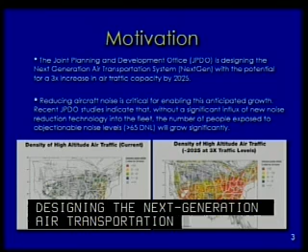In the way of motivation, as you well know, JPDO is charged with designing the next generation air transportation system, NextGen. One of its goals is the potential to increase the capacity of air traffic by threefold. Clearly, an important enabling technology for that is reducing aircraft noise to enable this growth. Without it, JPDO studies indicate that the number of people exposed to objectionable noise in and around airports will steadily increase. The graphic is just a visual representation of aerial traffic density. On the left is the current picture, on the right is if we have the 3 times growth. All of these planes in the air must take off from an airport near you and land in an airport near you.

So you see that noise is going to be a critical issue.

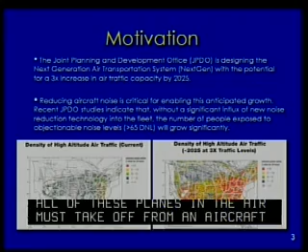Before going on, because we'll often be talking about noise levels in dBs, we thought it might be important to discuss what we mean. Because there is some subjectivity in noise, very well-defined metrics have been identified and enforced that define the effect of the noise on the community. They take into account the spectral content, the annoyance rating, duration, and this aggregate metric is called EPNdB, Effective Perceived Noise Level, dB.

For the purposes of community noise regulation, there are well-defined certification points that any commercial aircraft flying must meet in order to be certified. These are so-called approach for landing, takeoff/cutback, and sideline. There are precise trajectories, distances, and durations for these that every aircraft must follow, and the noise is measured, expressed in dB. The chart on the bottom, concentrate on the blue bars - those are representations of what would be measured at each of the 3 points: approach, cutback, and sideline.

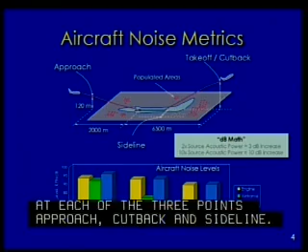In the subsequent charts, we'll often talk about cumulative margins, or margins more specifically. What we mean by that is for every class of aircraft, there are FAA rules, actually ICAO rules, International Civil Aviation Organization rules, that set limits on the noise that a given aircraft can make. The margins are what the measured level of that particular aircraft is at each cert point, subtracted from the noise regulation level. Generally you want to be below that, so that's typically a positive number. And then you do that for all 3 certification points.

You can express that as a cumulative metric - often that's what is done. But sometimes for the purposes of identifying trends, you could also look at an average. Both the sum and the average are straightforward arithmetic sums of the dB levels. An important thing to remember about dB is that it's a logarithmic scale, which means if you double the acoustic power, double the number of engines, the noise will go up by 3 dB. If you want it to go up by 10 dB, you need 10 times the power. So clearly, to make dramatic changes you need to do a lot, and the reverse is true also - to reduce significantly the noise, you need to do a lot of work.

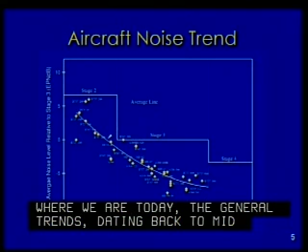Next slide, please. This graphic is meant to show where we are today, the general trends, dating back to mid-60s to about mid-2000. Not every aircraft flying is posted there, but a representative set is. The vertical axis is this average margin relative to Stage 3. The stages are the noise regulations, and Stage 3 was really the reigning rule from the mid-70s to about mid-2000. Clearly significant progress has been made over the years, and airplanes are much quieter than 20 years ago. But also, it's clear that the trend is leveling off.

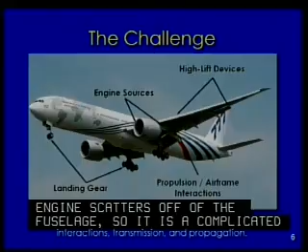And why is that? One main problem is that it is a very complicated problem. Individual sources are highly complicated, involving interactions of flow with every part of the aircraft that makes noise. And then the complicated interactions that the sources could have - the engine slung under the wing radiating is affected, the jet plume is affected by the wing downwash. The noise radiated from the engine scatters off of the fuselage, so it is a complicated problem. It's a worthy challenge to rise up to. I think the caption at the bottom really captures it: aircraft noise is a complex amalgam of sources, integration, interactions, transmission, and propagation.

Against this background of where we are, the challenges we're facing, the Subsonic Fixed Wing project, part of the 4 fundamental aero programs, has set itself goals to enable the JPDO vision. There are goals in noise, in emissions, and in performance. We have identified two generations of aircraft. If today's aircraft are labeled Generation N, then N+1 is the next generation - still a tube and wing, would look like, say, a 737, but more advanced. And then the follow-up generation, N+2, is something that would probably be radically different.

I'm not going to talk about all the goals of the Subsonic Fixed Wing project - we'll just concentrate on the noise. But the point to make here is that the levels, the targets you see, whether it's for N+1 or N+2, are meant to be the corners of the trade space.

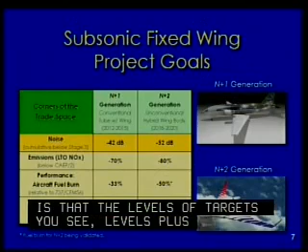If you were to optimize an aircraft just for noise, with acceptable performance elsewhere but really targeted at noise, those are the targets we think are achievable with technology that's already in the pipeline and what is over the horizon. These are cumulative margins relative to stage 3. So let's look at an average: for N+1 we're looking at 14 dB, and for N+2, 17 dB.

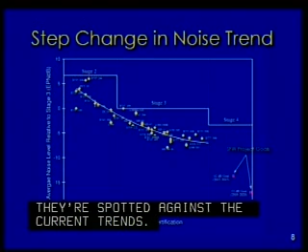They're plotted against the current trends. Clearly a step change in the way we do things, and remember the dB math—that's a significant change. So the goals of the program are very aggressive, but I think that's the kind of thing needed to achieve the JPDO vision.

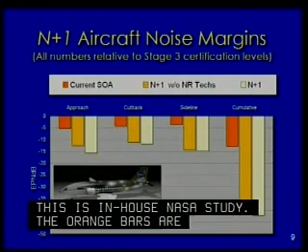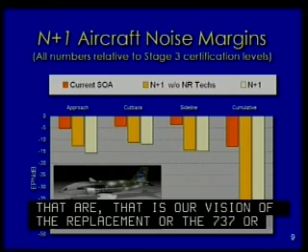A little bit more detail. This is an in-house NASA study. The orange bars are margins of a best-in-class single-aisle aircraft, something like a 737—in fact this one is an A320. It shows where it is today relative to stage 3 on a cumulative basis. The light yellow bars all the way to the right are our vision of the replacement for the 737 or A320, bringing the best of the technologies available today or in the pipeline. And you see that it's a significant change.

Technologies having to do with better airframe design, so-called ultra-high bypass ratio cycle engines, and some additional airframe and engine noise reduction technologies. Together, the so-called N+1 achieves the 42 dB goal. In fact, the goal was set on the basis of this study.

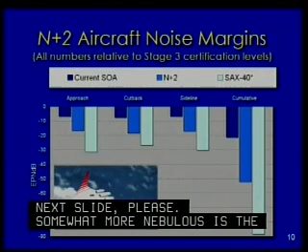Somewhat more nebulous is the N+2 design study. The dark blue, the current state of the art, is a 777, a 600,000-pound aircraft. The light blue in the middle is our vision of a so-called hybrid wing aircraft that would have significant improvements over N+1, cumulatively about 52 dB. We'll talk about the hybrid wing in great detail later, but principally it's the way the propulsion system and airframe are integrated, and the significant shielding you get from that integration that buys you the benefits.

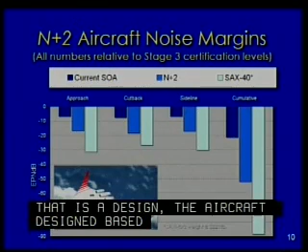For comparison's sake, we have also plotted the SAX-40. That was the aircraft designed based on the University of Cambridge and Massachusetts Institute of Technology's consortium over the course of three years—what they called a functionally silent aircraft that would blend with the background noise. So it was highly optimized for noise, and there were tremendous technical challenges that had to be overcome. They were way down there at about 86 dB cumulative. They had a much longer time horizon than what we are proposing to do, so we are naturally a little more conservative, and hence our goal is at 52.

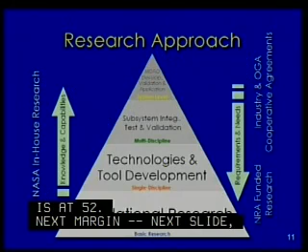Our research plan is really a common template between all fundamental aero programs, perhaps the entire aeronautics program. It's a layered approach that starts with the fundamentals—really understanding the physics of the problem and addressing the issues, whether prediction, mitigation, or diagnostics. Then we build technologies and tools at the discipline level, in this case acoustics, that address those needs, and push that up to the next level: integrate with multiple disciplines, and validate primarily the prediction tools we are developing, but also technologies, ultimately leading to multidisciplinary analysis and optimization. The knowledge and capabilities flow up, the requirements and needs flow down, and ideally this is a continuous loop so things improve constantly.

The research effort is too big for just one entity, so in-house we do what NASA does best—fundamental, leading-edge research—but we also work with our industry and academic partners to bring in talents and capabilities we may not have in-house. So we have NRA-funded research, primarily with universities but also some industry, and we also have partnership opportunities with industry and other government organizations. While NASA in-house research is really at all layers, the NRA-funded research tends to be at the fundamental and discipline level, though it can creep up to the next layer. The cooperative agreements are primarily at the multidisciplinary and system level approaches.

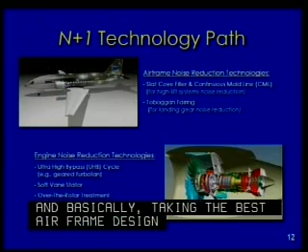Okay, we talked about the goals, 42 dB relative to stage 3. Here's the technology path: basically taking the best airframe design today, probably a 777, with the best high lift system, and scaling that down to the 737 class, assuming you can maintain the noise benefits.

Add some technologies to further mitigate noise from the high lift system, from the slats, from the flaps, and from the landing gear. Then mate that with a new propulsion cycle. Well, not new, but one that's been waiting in the wings, and I think it finally has its time in the spotlight - the ultra high bypass engine.

Basically, you slow down the fan tip speed. This way you reduce fan noise. You also reduce jet exhaust velocities, a notoriously difficult problem to mitigate. So you get significant benefits from the cycle alone.

But for insurance purposes, we also add some fan noise reduction technologies, specifically soft vane stators and over-the-rotor. We'll talk about the soft vane stators later. Both of those technologies, in fact, have NASA patents pending on them. So this is our technology path for N+1.

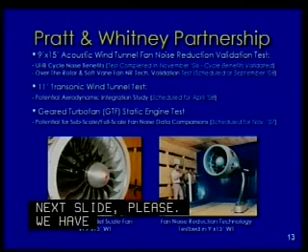Next slide, please. We have formed partnerships in the past, and we are continuing to develop partnerships now with industry partners who can help us push the front along on these technologies. Specifically on the propulsion side with the ultra-high bypass, we had studies that we did jointly with Pratt & Whitney.

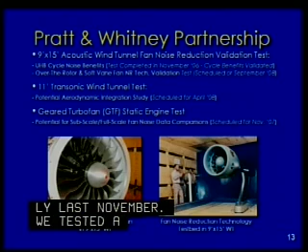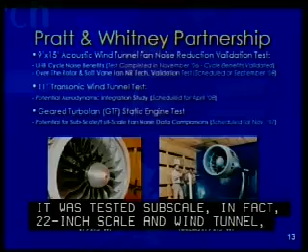Last November, we tested a scale model cycle of their version of a UHB, called the geared turbofan. It was tested at subscale, in fact 22-inch scale in a wind tunnel, and basically demonstrated the noise reduction benefits of that cycle. We are planning next September to test the over-the-rotor and soft vane technologies to buy us the extra margin we want with fan noise reduction.

There's potential now to work with Pratt & Whitney, still in negotiations with them, to do some integration studies in the wind tunnel. They also are planning, in fact have on schedule, to do a ground test of the fan system for the geared turbofan. So there may be an opportunity for us to work with them and compare the scale model noise data with the full scale to see if that connectivity is there the way we think it is.

I'll now hand off to my colleague to walk you through the next few slides. Russ? Good morning.

Next slide, please. We continue talking about our partnerships with the NASA Gulfstream partnership. This partnership is centered on the major airframe noise sources: the nose and main landing gear, and the flap side edge noise sources. You can see in the photograph of the aircraft flying, the flaps deployed - the sharp edges on the side are one of the important airframe noise sources.

This is a very exciting partnership. It's got a detailed 5-year plan, already 1 year into the plan. It began in FY07 with a flight test at the Wallops Island Flight Test Facility, and it will continue for the next 4 years, both with additional flight tests and a series of component tests of increasing complexity.

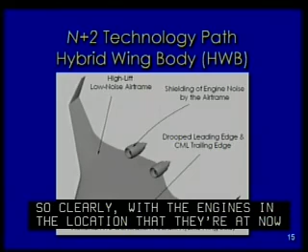Most dramatically, you see the engines can now be moved from the bottom of the aircraft to the top, and this introduces the potential for shielding of propulsion noise sources. With the engines in this location, you see the potential for large shielding of the forward radiated propulsion noise sources. It'll be a challenge to obtain shielding of the aft radiated sources, and that's going to be a large focus of continuing work.

It also changes the way the aircraft flies and the way the high lift system is integrated into the aircraft because of the blended wing body shape.

There's that blending of the airframe components as well.

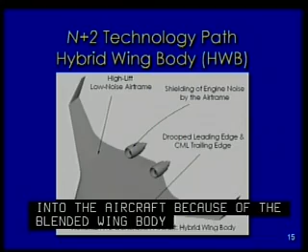Next chart, please. We've just concluded round 2 of the subsonic fixed wing NRA process, and I'll discuss several of the awards there that are very important in the acoustics area and directly related to this N+2 technology path.

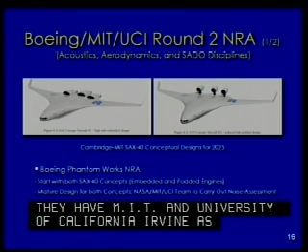The first award, just completed negotiation and awarded just 3 weeks ago, is led by Boeing Phantom Works. They have MIT and University of California, Irvine as subcontractors. We're beginning to integrate a large team from NASA in the acoustics disciplines, the aerodynamics disciplines, and the system analysis and design optimization discipline as well.

The Boeing team was able to take advantage of that same Cambridge MIT Institute work that was done on the Silent Aircraft Initiative over a period of 3 years. They'll start with these 2 aircraft concepts that are shown.

On the left, you see the SAX-40 design with the higher risk, higher payoff technologies that included embedding the engines in the airframe. On the right, you see a lower risk, but still a dramatic step change in technology and noise reduction potential. It's the podded version of this aircraft.

The Boeing team will start with these 2 concepts, and over the first year, they will go into much greater detail of the design, closing out the aircraft design in 1 year. They will look at technology suites to add to these aircraft, and by the end of the first year, working together with NASA, they will plan in year 2 and year 3 a large-scale, high-fidelity wind tunnel test.

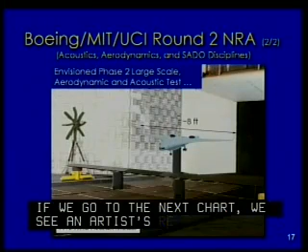If we go to the next chart, we see an artist rendering of what is envisioned for that phase 2 large-scale, high-fidelity wind tunnel test for both aerodynamic as well as acoustic characteristics of this type of aircraft. We see the 14 by 22 wind tunnel with this concept ready for testing there.

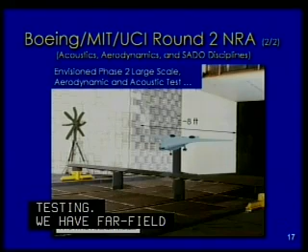We have far-field microphones deployed, the latest phased array technology to image the acoustic sources. This is going to be a big challenge. As we bring the airframe noise sources down and the engine noise sources down, it's going to take a greater resolution of measurement technology to properly characterize these.

And so this is envisioned for the phase 2. It'll occur in 2010 if we proceed to that stage. Next chart, please.

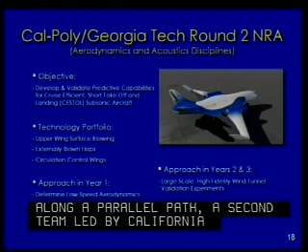Along a parallel path, a second team led by California Polytechnic with Georgia Tech as subcontractors are also proceeding. In this case, they're going to be focusing on that metric that was listed in the subsonic fixed-wing goals for field length, going after the cruise-efficient, short takeoff and landing subsonic aircraft concept.

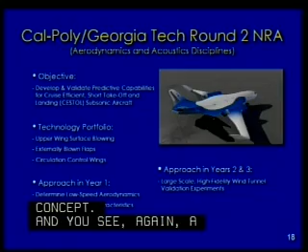You see, again, a rendering of that type of concept. They'll look at the technology portfolio, including upper surface blowing, externally blown flaps, circulation control wings that enable this short field takeoff. Again, in year 1, they'll be putting together the tool set to design and optimize this type of configuration. A key is going to be how they integrate and predict the acoustic characteristics of these technologies integrated into a complete aircraft concept.

Then, like the Boeing-led concept, in year 2 and 3, they'll be putting together plans to do a large-scale, high-fidelity wind tunnel test of this type of concept. In this case, they're aiming now towards the National Full-Scale Aerodynamic Complex, in fact, at the NASA Ames site.

Next chart, please. A different set of concepts were awarded in round 2. Whereas the first 2 focused on the complete aircraft concept and technology, these are going to focus more on individual technologies, which we think are very promising and can really change the way aircraft are designed and flown and impact the acoustic characteristics.

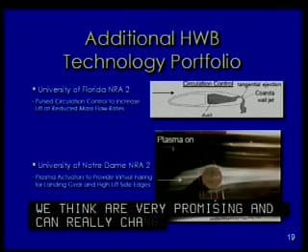The first is at University of Florida. It's going to be focusing on circulation control. Of course, this technology can dramatically increase lift coefficient and therefore enable lower speed takeoff and landing, and also increase the separation between the aircraft and the community below, and change the airframe sources as a result of that.

In particular, they're going to be looking at pulsed circulation control, or unsteady circulation control, which can increase the lift while reducing the mass flow requirement through the circulation control jet. And of course, they're going to be developing a very high quality aerodynamic and acoustic data set, which has not been done before. That's going to be a very important step forward in understanding this technology.

The second one will be done by University of Notre Dame, and it's on plasma actuators.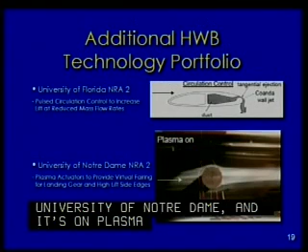You see there in the photograph to the right a cylinder in a wind tunnel, and smoke visualizing the flow field, flow from left to right. Normally, flow over a cylinder you would see a large separation zone downstream, but with the plasma actuators on, the flow is smooth over the cylinder, and there's no large separation region.

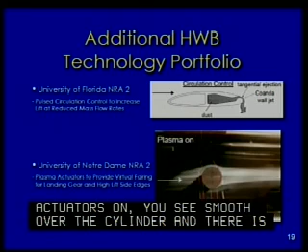Plasma actuators hold the promise to provide virtual fairings for airframe noise components like the landing gear and the flap side edges. We think it's a very promising technology with multiple applications, and we're looking forward to this work as well.

One of the keys here is to push the technology of plasma actuators to higher Reynolds number, more realistic applications. Next chart, please.

So we're very excited about those NRAs and the potential for what they can do in the N+2 category.

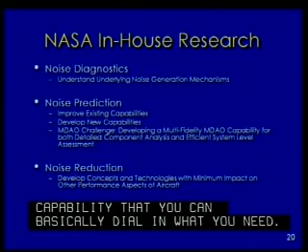The challenge we've set for ourselves is to develop a capability where you can basically dial in the fidelity that you need. If you're studying a specific component and can afford the computer resources and time, you can study it in great detail, and we'll show some examples of that. But you can also turn the dial to something not as high fidelity but more efficient, so you can do a system level analysis and study a number of systems in a reasonable amount of time.

Ultimately, the diagnostics and prediction are going to help us devise noise reduction technologies that have minimum impact on the other performance aspects of the aircraft. We have traditionally worked these in a synergistic manner, so there's a give and take and a continuous improvement loop between these. Next slide, please.

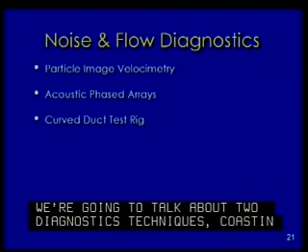I'm going to systematically go through and show highlights. Just like the entire presentation, this is only a highlight of what we do, but I think these are areas where NASA is doing very well, in some cases at the leading edge of that work. I'm going to talk about two diagnostic techniques, particle image velocimetry and acoustic phased arrays, and also a new capability we are developing at NASA to really understand liner physics.

Next slide, please. On the PIV, particle image velocimetry, and phased arrays, the top graph shows an actual visualization of the turbulence in the jet plume of a co-annular jet. This was a scale model test. By seeding the flow with particles small enough that they don't affect the flow but large enough to reflect laser light, then using very complicated image processing, you can develop a snapshot in time of the intricacies of the spatial distribution of a major source of, in this case, jet noise, which is turbulence.

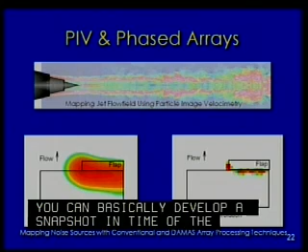This technique is now pushed into the time domain. There have been recent tests at NASA where you can actually sequence this in time and trace the evolution of turbulence, which is equally important in jet noise research. We have also attempted to do PIV for turbomachinery behind fans to understand the evolution of turbulence from the fan rotor as it impinges on the stator. On the bottom is a graphic of another area where NASA is very good: phased arrays.

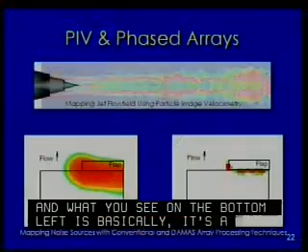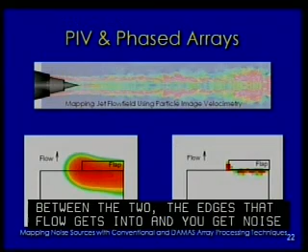What you see on the bottom left is basically a main wing and the flap, and the noise source is the discontinuity between the two, the edges that flow gets into, producing vortex shedding and noise. Using conventional beamforming methods, the analysis of phased array data which is essentially an acoustic camera, it's not very clear what the primary source is. But a method developed at NASA called DAMAS, the deconvolution method, actually filters out the extra noise, and you can focus on the real source, which is the flap side edges.

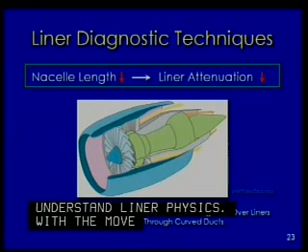On the diagnostics, I'll talk now about a set of unique capabilities we're developing at NASA to really understand liner physics. With the move toward larger diameter engines, UHBs, the nacelles need to be shorter because of weight considerations. That reduces the real estate you have to apply liner. So understanding the liner physics so you can optimize it and take advantage of the minimized real estate is very important.

What we are doing in this program is developing two sets of unique capabilities to address grazing flow effect on the liner. You can measure the liner in static condition and it will have certain performance, certain impedance characteristics. You put flow over it, things change, and of course there's flow inside the engine, so it's important to understand the effect of grazing flow. We're developing two capabilities that address measuring the performance of a liner subject to grazing flow for realistic flow conditions, realistic frequencies, and essentially realistic scale.

One is the so-called grazing flow impedance tube, a facility that allows you to really, under a very controlled environment, look at the performance of the liner subjected to different boundary layer growth, and acoustic waves sent from upstream or downstream, to understand what the liner is doing.

What this capability does not afford you is realistic mode content, the modes inside the engine - these are acoustic components from the sources. For that, we are developing a different capability, the curved duct test rig, which allows us to go the next step and put more realistic modal structure for the noise. Of course the conditions are not as controlled as the first facility, but together they provide a powerful capability.

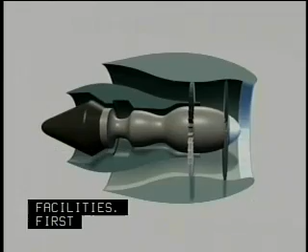There's an animation of the two facilities. First, typically where you would put liners are in the inlet, the exhaust duct, and the bypass duct.

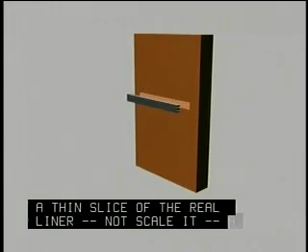So the idea here is a graphic representation of taking a thin slice of the real liner, not scaled, and then putting that into the grazing flow impedance tube for testing purposes. The black knobs upstream are speakers - you can dial in the kind of noise feature that you want - and the wires represent leads to the microphones where you make measurements. You can interchange different pieces to control the boundary layer growth.

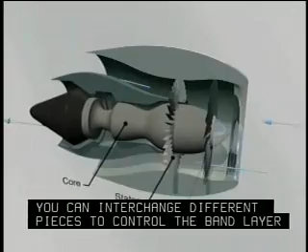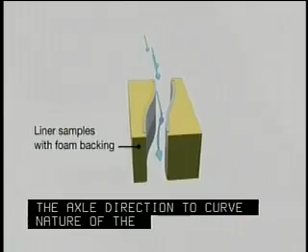That's the grazing flow. For the next step up, the so-called curved duct test rig, you basically take a real section, say full scale for a regional jet, and unroll it but maintain the curved nature of the duct in the axial direction. Then you can put samples of the liner with some foam backing in there and make detailed measurements under realistic flow conditions and realistic frequencies.

Both of these facilities are essentially unique. My understanding is that you have external customers already lining up to make measurements in those.

Next, on modeling and prediction, I'll again step through only a handful of areas, but I'll sample capabilities that are purely computational, capabilities that are a hybrid between computation and analysis, and capabilities that have to do with basically empiricism.

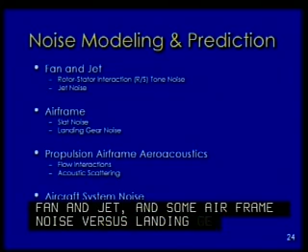We'll talk about the top two bullets on component prediction - fan and jet - and some airframe noise sources like slat and landing gear. We'll talk about propulsion airframe aeroacoustics, two kinds of interaction: flow interaction and acoustic surface interaction, or scattering. And then we'll close with the real challenge: aircraft system noise prediction.

We'll walk you through the current capability, the Aircraft Noise Prediction Program, ANOPP - you've probably heard that acronym before. And then we'll also introduce the future ANOPP II, a new framework that allows the variable fidelity capability we talked about earlier.

Here's an example of basically a direct computation of fan noise. For a UHB, an ultra-high bypass cycle, jet noise is almost a non-issue.

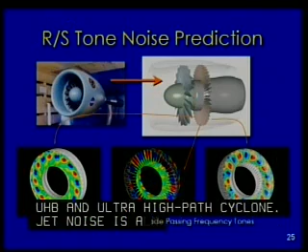So the fan noise is a dominant source, so understanding fan noise is critical. Here's a calculation that takes into account the real geometry of the rotor and the real geometry of the stator, and gives you essentially a field solution.

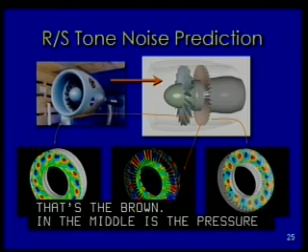You know the noise field everywhere. On the left is the sound field upstream of the stator, that's the brown blade row. In the middle is the unsteady pressure distribution on the hub, tip, and blade, and downstream is the wave propagating. If this was animated, these patterns would be rotating and corkscrewing forward or aft. These are the so-called modes we talked about earlier.

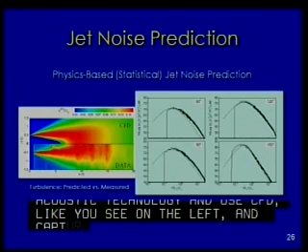So really the king of the hill today continues to be these hybrid methods predicated on the so-called acoustic analogy. You basically do a computation using CFD, like you see on the left, and capture the source of noise, namely turbulence, distribution of turbulence kinetic energy, integral length scales, and what have you, and then use that as input to a very rigorous analytical model of the noise that solves for the noise radiation given these sources.

What you see on top is the CFD prediction for turbulence in a jet plume, and the bottom is the data. Obviously improvements need to be made, and they continue to be made.

On the right is the prediction. It's a bit difficult to see, but the idea is that the predictions are pretty close to the measurement. The angles are measured from the axis of the jet: 180 degrees is downstream in the jet plume, 0 degrees is upstream.

So you don't really expect to get a very good comparison upstream, because there's shielding from the nozzle and other effects we're not modeling here. But downstream, certainly where we think this should work, it does work.

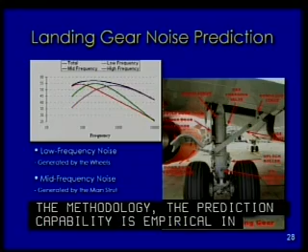So there are different components built that account for, say, the wheels, the main strut, and the smaller parts of the landing gear. The prediction capability is empirical in nature, but the input that drives the empirical coefficients comes from CFD. So this is an example of marrying CFD with an empirical method.

Next slide. I'll now hand back to my colleague, Dr. Thomas, to cover some exciting features that we're working on.

So you've seen some snapshots of individual components being studied and prediction methods being developed. One that we've worked on for several years is to look at the interactions between components, because as you can see in the photograph, when you integrate airframe and propulsion, that creates complexities and interactions that occur.

So this is a flow interaction type, where you see the exhaust flow being affected by the presence of this pylon structure that connects it to the wing, and then later by the wing downwash and flap downwash.

So we started several years ago with this approach of studying the basic jet-pylon interaction and developing noise prediction tools for it. To do the statistical type of noise prediction development that Ed referred to, the RANS-based CFD methods, you have to, of course, compute the flow field accurately.

The first chart in the circuit is a split screen. On the left, you see total temperature measured in a laboratory experiment without a pylon, so this is just a round jet. On the right is the best off-the-shelf aerodynamic CFD prediction tool. You can clearly see the difference between measurement and prediction—the flow field prediction is off considerably.

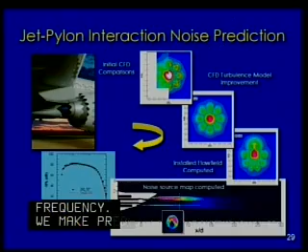Now we move on to making improvements in the noise prediction method so they can handle a greater range of directivity and frequency. We make prediction improvements in the basic flow field measurement as well, and downstream we look at making use of unsteady methods to improve certain regions of the flow field. So this is a snapshot of two years that we'll build on in the future.

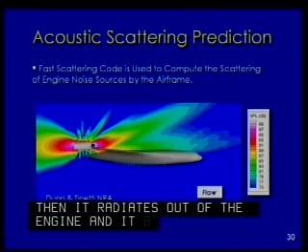Next slide, please. That was one example of a flow interaction. Another type of interaction is acoustic scattering, where propulsion noise, for example, is produced at the source, radiates out of the engine, and begins to interact with an airframe—it can either be reflected or shielded. In this image of a prediction being developed, for an N+2 configuration, you see the propulsion noise sources simulated on top of the airframe and then interacting with it, being shielded by the airframe.

This is being done on an NRA, a round one NRA. It's a fast scattering code under development. The key here is really pushing its usefulness to a broader range of frequencies and working on reducing the computation time. It's still a very computationally intensive process, and to make it more usable and realistic, we've got to work on that computational requirement.

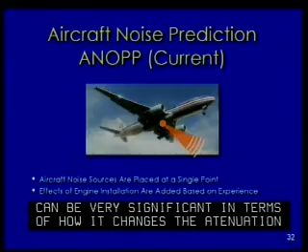As a result, it's been built up over the years to do what it's done, which is work on that conventional configuration, but it can't venture too far out of that. Most of the methods that have gone into creating a fast, efficient system noise prediction method are largely semi-empirical. They have theoretical components, data correlations, curve fits from experimental data.

Now we'll go into a little more detail in the next chart as to this paradigm shift. In the top half, you see the familiar pyramid. At the wide base there, you have the foundational physics and modeling that we've given some highlights on when we look at the individual sources.

ANOPP then resides in the green bar there, the discipline level capability. That's where these components are rolled up together into an aircraft system noise prediction method, which can then feed into the MDAO and the system design goals at the top of the pyramid.

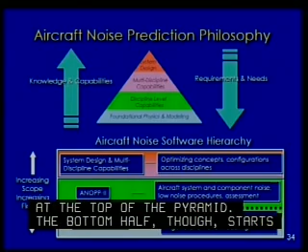The bottom half, though, starts to address the magnitude of this change from ANOPP to ANOPP II. For system design, MDAO capabilities, you need a wide scope. You need to address a wide range of noise reduction technologies, configurations, operations, etc. So the requirement there is for rapid types of calculations. You can't run high-fidelity CFD codes for weeks and weeks.

But if we're going to address these types of requirements, we need the high-fidelity codes or the products of those high-fidelity codes, which are at the bottom, the research codes. These are of increasing fidelity. And so ANOPP II is going to have the very tough job and challenge of being that middle, transferring that knowledge and that high-fidelity prediction capability into a usable tool for system noise design.

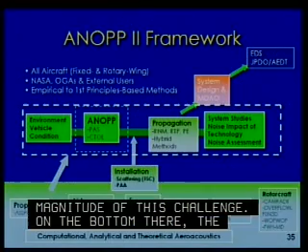Next chart elaborates more on the magnitude of this challenge. On the bottom there, the half is that wide base, the foundational capability. These are most, not all, of our high-fidelity research codes that have been under development sometimes for many years by teams of researchers, or are new codes that are in the process of being developed. These codes, again, are typically research codes, high fidelity, large computational resources.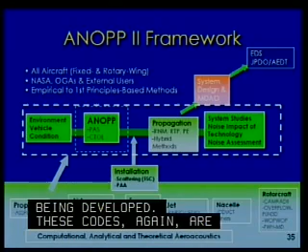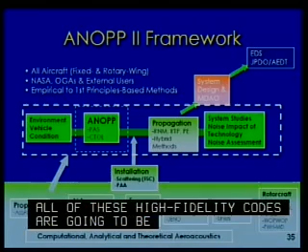You see there in the middle, beginning that bridge, the installation effects that are being addressed by sets of codes. In the middle there, around the porous boundary, the dashed boundary, is the framework for ANOPP II. All of these high-fidelity codes are going to be linked into that ANOPP II framework, and they're going to have to be accessible, usable to that framework.

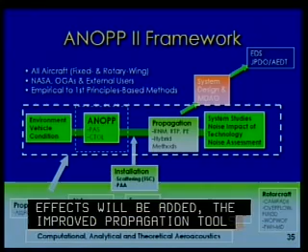ANOPP, the old ANOPP, still resides within that ANOPP II framework as a low-fidelity component of ANOPP II. But the installation effects will be added, the improved propagation tools will have to be added to work in this framework. It's going to be a real challenge to do this, and to provide a usable tool to system design and MDAO requirements and then on up to EDS requirements. So this is going to be a great challenge.

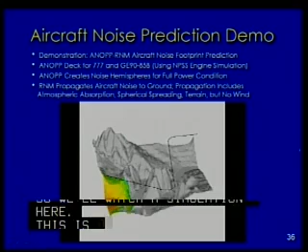We want to give a picture of ANOPP, the capability of ANOPP as it exists today, with some of these improvements that have begun to be integrated into ANOPP. So we'll watch a simulation here. This is a demonstration of ANOPP combined with a propagation tool, one of the propagation tools.

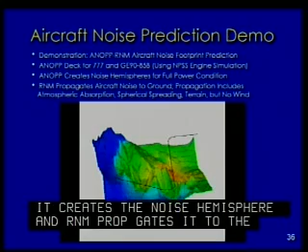It's a simulation of a 777 with a GE-90 flying over a terrain. This terrain is from the U.S. Geological Survey, you can download it. ANOPP creates the noise hemisphere, and then RNM propagates it to the ground. You see the high noise levels in red, lower noise levels in blue, as the aircraft flies along this track, descending into the canyon and then gaining altitude and flying out. The aircraft is just represented by a dot there, for the purposes of this simulation.

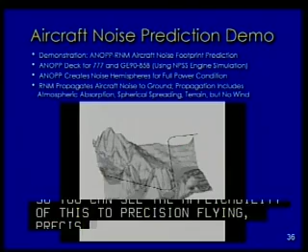So you can see the applicability of this to precision flying, precise studies of noise as aircraft approach or depart from airports, or other applications of community noise interest. Next chart, please.

Now we move on to the third in the triumvirate of research, the noise reduction technologies. We'll highlight a couple of key technologies, by no means all of them. In the engine area, we'll look at the soft vane stator. Under the category of interactions, propulsion-airframe aeroacoustic interaction, we'll look at the PAA chevrons. And then in airframe, we'll look at two noise reduction concepts, the continuous mold line and the landing gear fairings. Next chart, please.

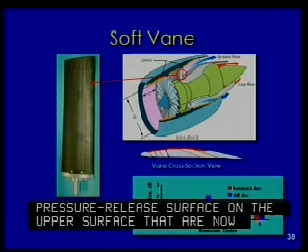The soft stator vane addresses that rotor-stator interaction which Ed addressed earlier. It goes on the stator vane in the bypass duct. In the photograph to the left, it has a perforated surface, or a soft pressure release surface, on the upper surface. Looking at the cross-section of the stator vane, inside there are cavities of varying depth, which give it a frequency dependence. And then the bottom surface, the pressure surface, would be solid.

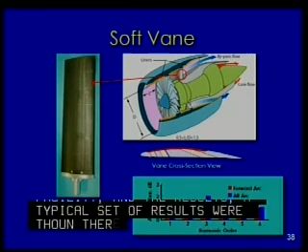This has been developed over a couple of years. It's been tested in the 4-foot low-speed fan facility. A typical set of results is shown in the plot, a solid 1 to 2 dB reduction. But what's very promising is that while it was designed for tonal reduction at the source, it also shows broadband noise reduction. And while it was intended to reduce aft-radiated sources, it also reduces the sources radiated out the inlet, the forward arc. So this is a very promising technology.

The next step is to move this to more realistic, higher speed fan applications, and that can be done in the 9x15 test of a UHB concept. Next chart, please. The PAA integrated chevrons.

This is a large story covering one of our recent partnerships. This started in 2003. It was a partnership between Boeing, NASA, General Electric, Goodrich, and the FAA, who provided critical funding to this whole project.

This part of the partnership addressed the idea of integration effects, and how we could take a technology like chevrons that had been under development for many years and make it better, getting more noise reduction out of it by understanding the integration effects between jet and pylon. So we did a lot of exploration work, using the best prediction methods we could bring to bear. You see an example of that, studying the asymmetry created by the interaction of the jet and the pylon. We then went to working technically with Boeing.

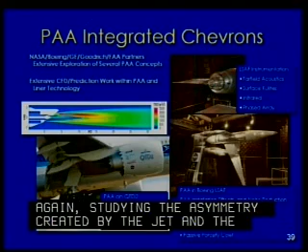We went to their facility, the low-speed aeroacoustics facility. This is a facility where we can do this type of system testing, where you have the fuselage, the wing, the high-lift system, and the jet exhaust. It's a very promising type of testing approach necessary for this understanding of interaction effects.

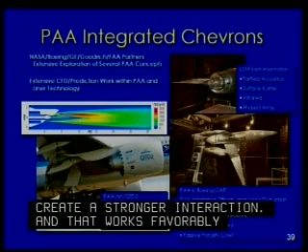We studied a range of technologies, including a family of chevron nozzles that we hypothesized would improve their acoustic performance based on a favorable interaction between jet and pylon. And you see, flying in 2005, the best of those nozzles, the T nozzle, where the chevrons closer to the pylon have a stronger effect on the flow field. They're longer, they have more immersion, they create a stronger interaction, and that works favorably with the pylon, clearly superior to the uniform circumferential chevrons.

Now you'll see a trend here, a theme which is very important. In this case, it's not just about the chevrons, but about what we gain from the system testing, the subsystem, system-level testing, where we're testing complete models: fuselage, wing, flap system, and propulsion source. You'll see that in the NRAs that we talked about in the beginning of the presentation. We're headed towards higher fidelity, large-scale integrated testing where we can address the major interactions and the sources and achieve better understanding. That relates again to the system-level prediction methods, ANOPP and ANOPP II.

This type of trend is going to be very important. It's also very difficult, a great challenge, both from a complexity point of view, an instrumentation point of view, and just a test configuration point of view. Next chart, please.

Airframe noise reduction: continuous mold line link. Here we see a large-scale test in the 14x22 wind tunnel of a more realistic wing. This is a swept wing with a slat cove filler noise reduction concept, and you can see the flap has been deflected.

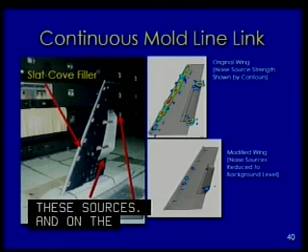On the right you see the phased array imaging of these sources. On top is the original wing without the noise reduction added, and on the bottom you see these concepts have proven their potential at reducing those sources by several decibels. This is again one step further in developing these concepts, developing understanding, and moving on to more realistic prediction and noise reduction applications.

Next chart, please. Landing gear noise reduction. While one team working with Boeing was working on the chevrons, another part of the NASA team, the airframe noise team, was working with Goodrich and Boeing on the landing gear concepts for this flight test. This occurred in 2005, with a set of tests at both subscale and full-scale flight application. We've talked about the landing gear and the complexity of it, the multiple bluff body shedding sources of the landing gear.

This was an attempt at a partial fairing of the landing gear, again balancing application realism against the desire to maybe fair the entire landing gear. Together with the subscale test, it showed good promise. I think what is most important about this, and this picture really brings it out clearly, is that it motivates us to address these interactions.

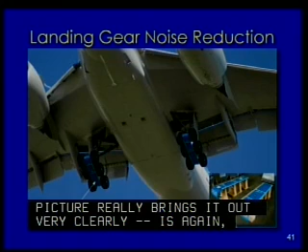In this case, between one airframe source, the landing gear, and the other airframe source right behind it, the high lift system. The high lift system deployed like this, through the potential flow effect, creates a change in the flow pattern over the landing gear. We have to address that. You can't do that just with a component test of the landing gear.

And then the shedding of vortices and turbulence from the landing gear is in turn impacting the flap source downstream of it. So this test really brought out the motivation to pursue that type of system-level testing, more complex, more ambitious understanding of these interactions. Next chart, please.

So we move to summary. We hope we've reminded you that aircraft noise is critical to the future growth of the air transport system. People want to move, and they want to move more and more goods and services, and aircraft noise continues to be critical to that growth, enabling that growth. NASA continues to work closely with the JPDO and the FAA to do our part to enable that future growth of the air transport system.

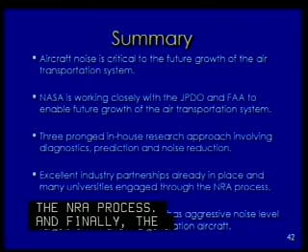We have a very effective three-pronged research approach involving diagnostics, prediction, and noise reduction. And in that approach, specifically in partnerships, we continue to enjoy and benefit from excellent industry partnerships and engage a number of universities through the NRA process. Finally, the Subsonic Fixed-Wing Project has moved out with aggressive noise level targets for both the N+1 generation and the N+2 generation of aircraft.

Finally, on behalf of the acoustics discipline, and my co-speaker here, Dr. Envia, thank you very much for your attention, and we'd be happy to entertain questions.

George Price from the JPDO: Have you rolled up all the things you're doing to see, when you started, you put up some goals—if I remember, it's -42 and -52 dB. If you take all the things you're doing, have you rolled up projections of that to see how you do against those goals?

I'll answer that question. The goals that were set were based on internal studies saying, if you use these technologies, this is what you're going to get. So the goals followed from the study, not the other way around. The challenge is to demonstrate, mature those technologies, and validate that they would actually achieve those targets. Those were based on the studies at the time. We'll continue to improve those studies as we get new information.

Have you looked at the effects of blade mistuning, either natural or intentional, to reduce noise from engine sources like fan blades or stator blades? Well, it will help if that's the primary source. You can mistune tonal sources more than broadband ones. If you have a dominant tonal noise, that was certainly one approach. Another approach may be active noise control if you're going after a specific frequency. To answer your question, no, we have not specifically looked at that particular idea.